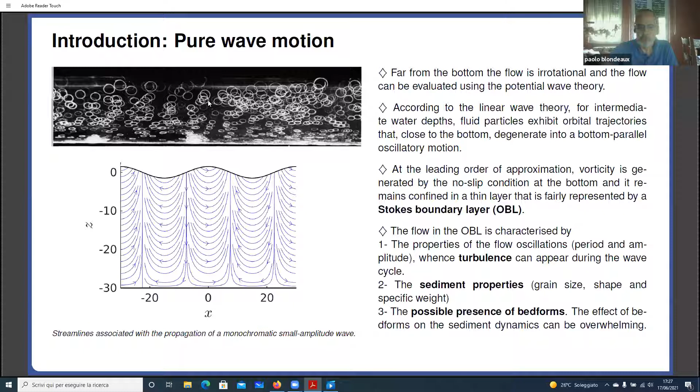Indeed, when you study the flow generated by a propagating wave, usually you split it into an irrotational region and the bottom boundary layer. The irrotational region is described by linear, nonlinear, or numerical models, and usually good results are obtained. On the other hand, what happens in the boundary layer, and in particular when you have sediment transport in the boundary layer, is not well reproduced by the models.

Let me show you, for example, these results, which have been obtained at the end of the last century, in 1995. The results plot the concentration within the bottom boundary layer at two different levels when you have suspended sediments. You see that the models at that time were unable to reproduce the amount of sediment, with errors of the order of 100%, but also the phase of the peak was not well reproduced.

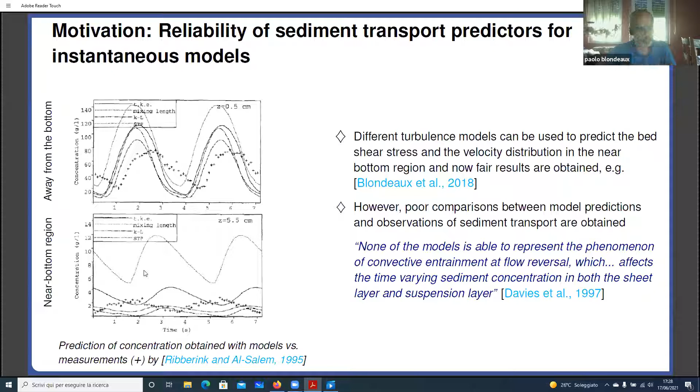Unfortunately, during the last 20 years, there was some improvement, but no very significant improvement. So this topic should be further investigated. We decided to focus our attention on the bottom boundary layer, so we moved our attention from the free surface to the bottom boundary layer.

The flow within the bottom boundary layer is mainly controlled by the Reynolds number, which here is made with the viscous thickness of the bottom boundary layer. Of course, you can use also the amplitude of the fluid displacement oscillation, but the two Reynolds numbers can be easily related. Then the phenomenon of sediment transport contains also morphodynamic parameters: the ratio between the grain size and the boundary layer thickness, the relative density, the mobility number, and the Reynolds number of the particles.

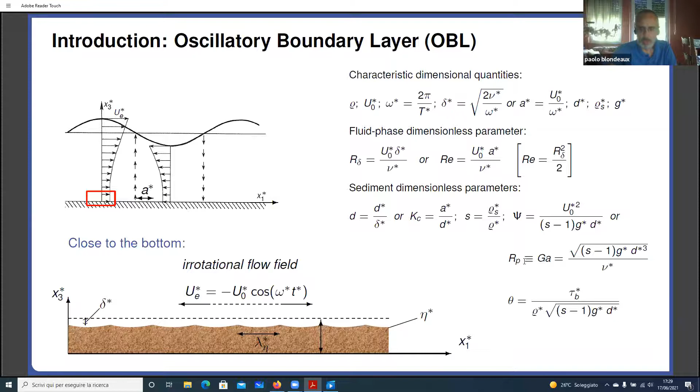In order to investigate the phenomenon, we used direct numerical simulation. I mean, we integrated the Navier-Stokes equation and continuity equation, and the code we used was able to determine even the flow around each sediment particle. We forced the no-slip condition around the sediment particles using the immersed boundary approach. Of course, we were not able to consider the shape of the grains, and we assumed that the grains are mimicked by just spherical particles.

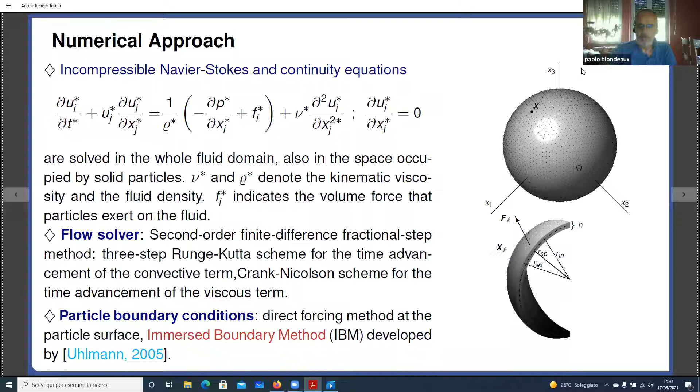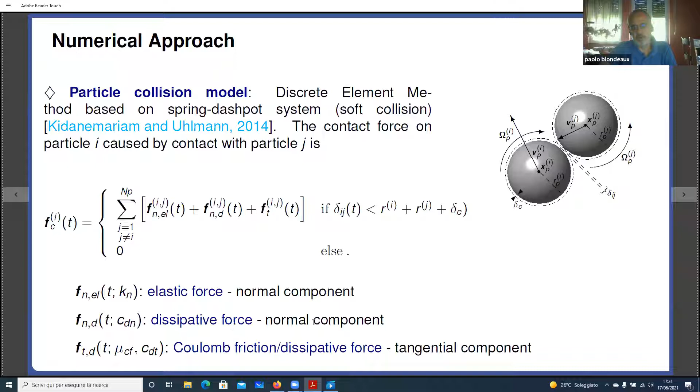The flow around the particle was solved exactly because we used the Navier-Stokes equation. The only modeled part is due to the collision between the particles, and we modeled the collision assuming three contributions to the force: an elastic force, which generates a normal component; a dissipative force, due to viscous effects; and the viscous effects generate not only a normal component, but also a tangential component.

Let me show you an example of the results we obtained. Here you see three plots. Here we consider parameters which correspond to, let's say, medium sand. You see that the Reynolds number increases from 450 to 1000, so close to transition from the laminar regime to turbulence. In the other two plots, you have a turbulent regime.

In this plot, you have what is called the intermittently turbulent regime. Turbulence appears during the decelerating phases of the cycle, but the flow tends to recover a laminar behavior during the accelerating phases. Here, on the other hand, you have turbulence throughout the whole cycle. The last plot describes what happens if you increase the size of the sediment grains. Let us see what happens.

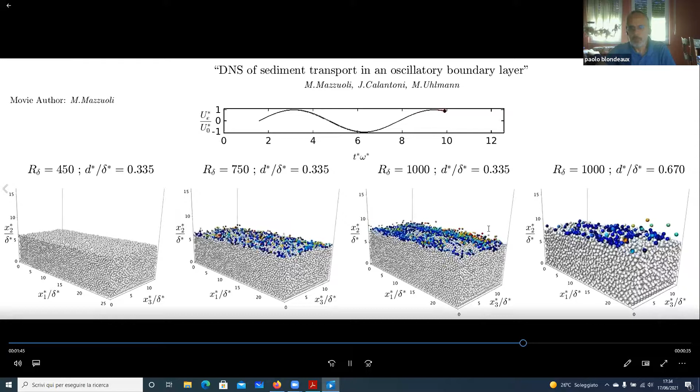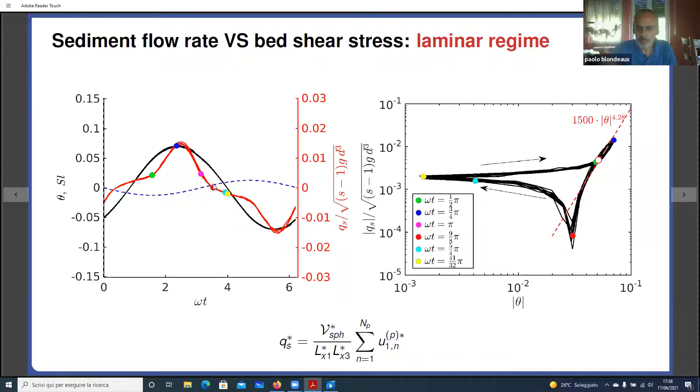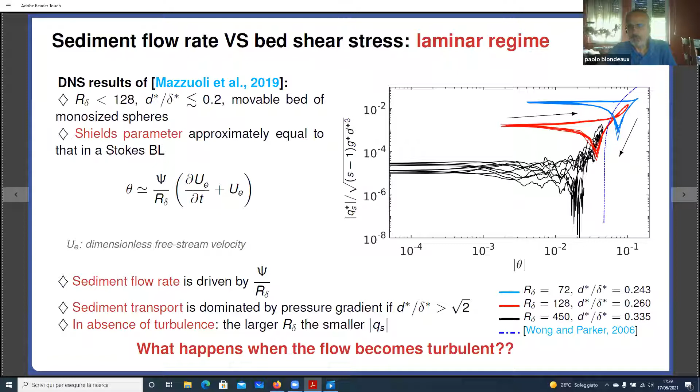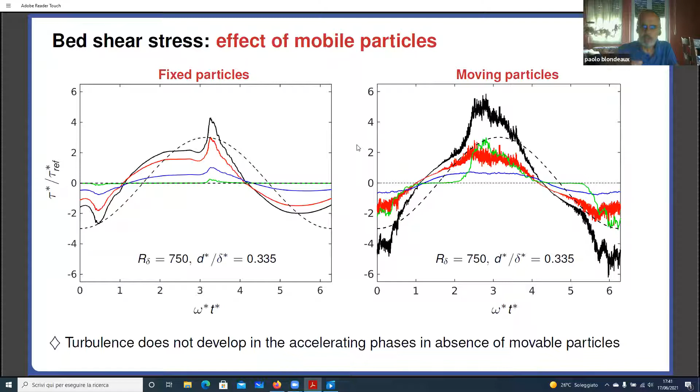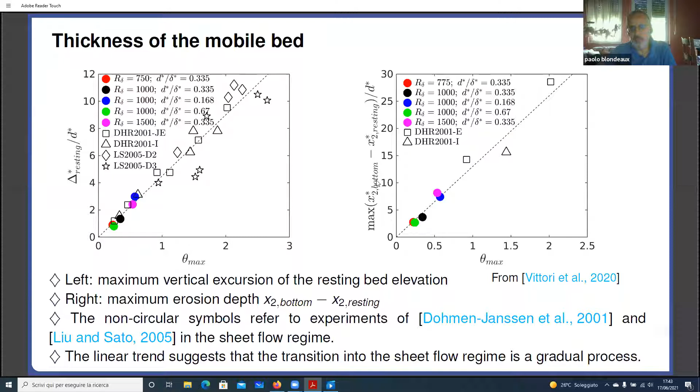Here you can see the results of the simulation plotted along with other experimental measurements, which measure the oscillation of the resting bed during the wave cycle. I mean, when you consider an oscillatory flow, the Shields parameter changes, so you have different elevation of the resting bed during the cycle. And these are the experimental results, and these are the results of our numerical simulation. And these are similar results, which show the thickness of the layer of moving particles.

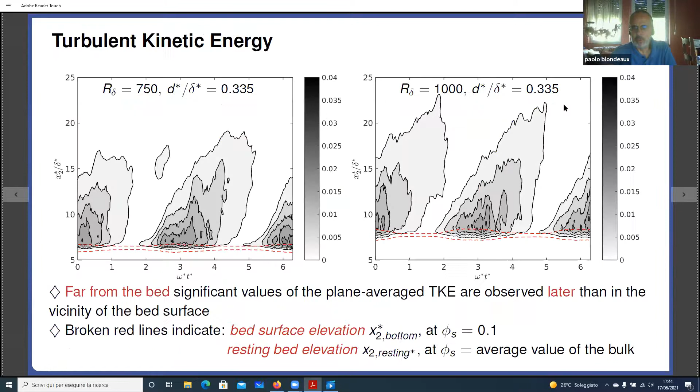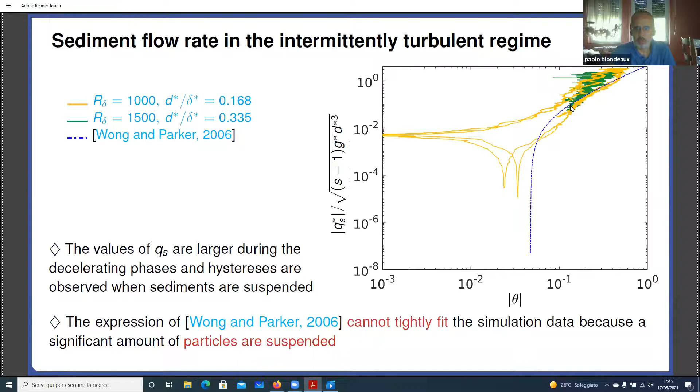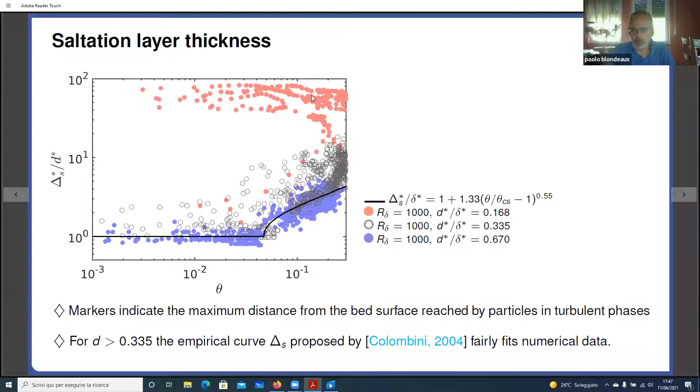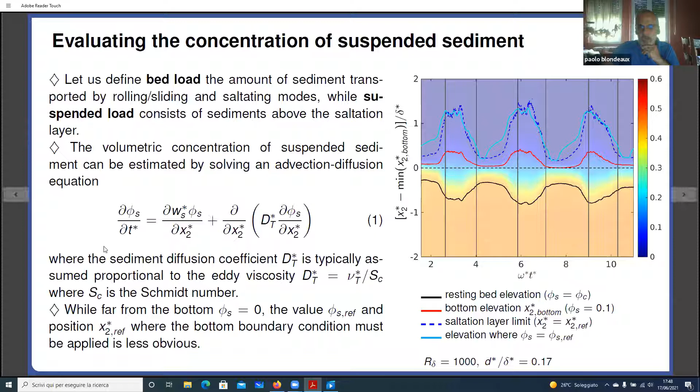So it seems to us that the reference concentration should be forced at a distance from the bottom which is not twice the grain size, but which is the upper part of the saltating layer, or the saltation layer. So let's say that we propose to use as a reference level this empirical formula, which is mainly based on the thickness of the saltating layer.